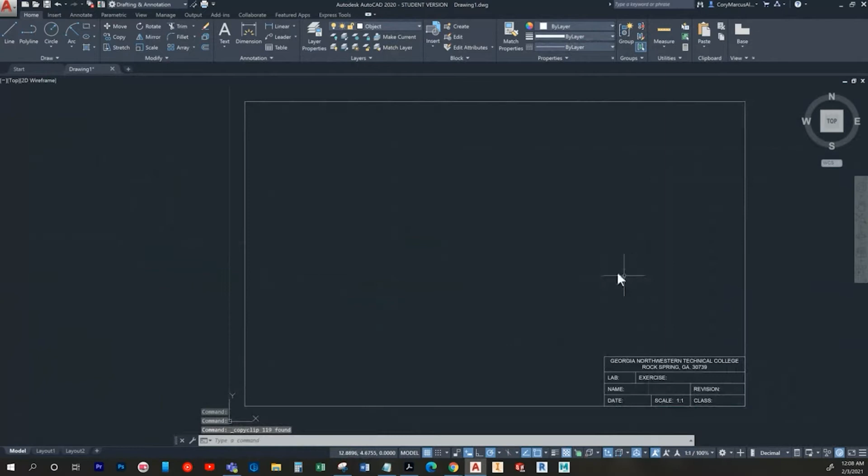So from the last one, I'm actually going to kind of cheat and copy the same one over here, but we're going to change it up, of course. I just don't want to have to redraw the head, basically. So we're going to do 6 thread per inch, right hand double thread.

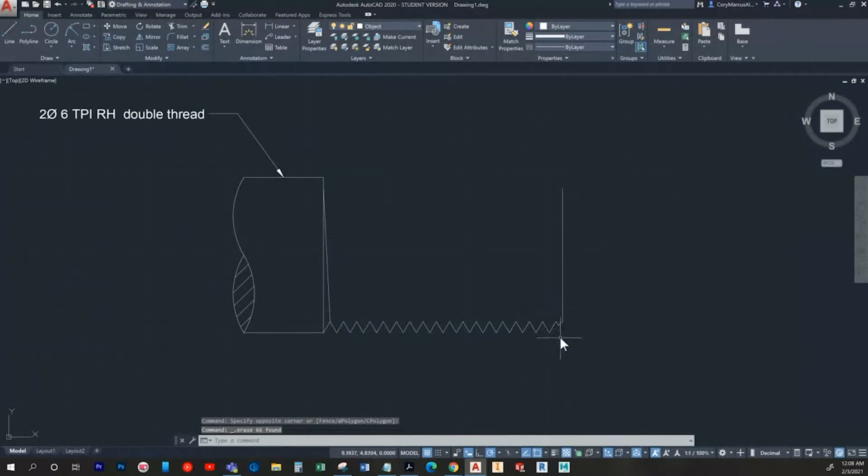So the big difference here, and we're going to do no chamfer on this one just for the heck of it, just to have a little bit of variation here. So the big difference is going to be that traversal distance.

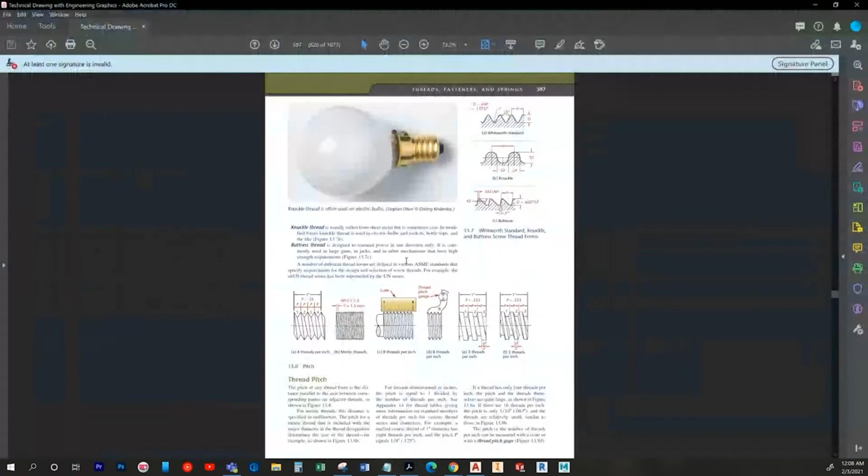And you know what? I guess we could have probably kept our actual profile, but technically it is different. So like you've got the same shape, but the placement's different. So instead of going up from the start, you're technically starting at the middle, so it'll go down, and then you're going to have it mirrored across the axis.

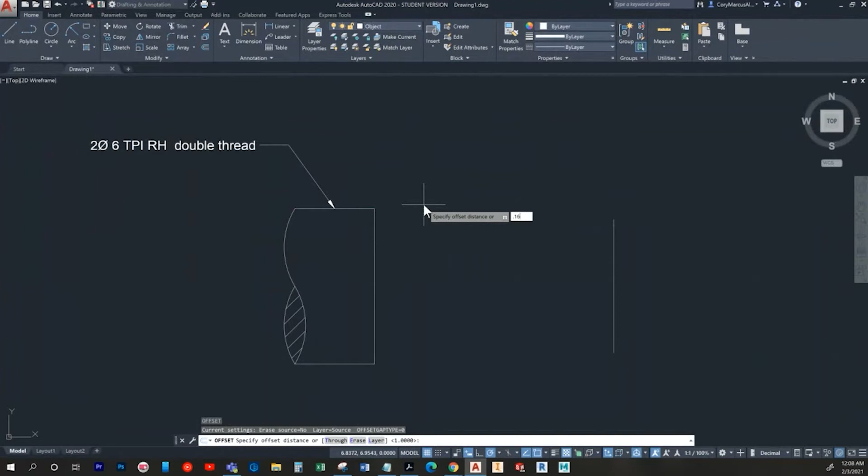So I'll just draw it again, no biggie. And we're going to do offset of 0.16667. I'm going to go ahead and just connect the dot here between the two so I have a good midpoint. And then we're just going to slap in the 30-degree angle.

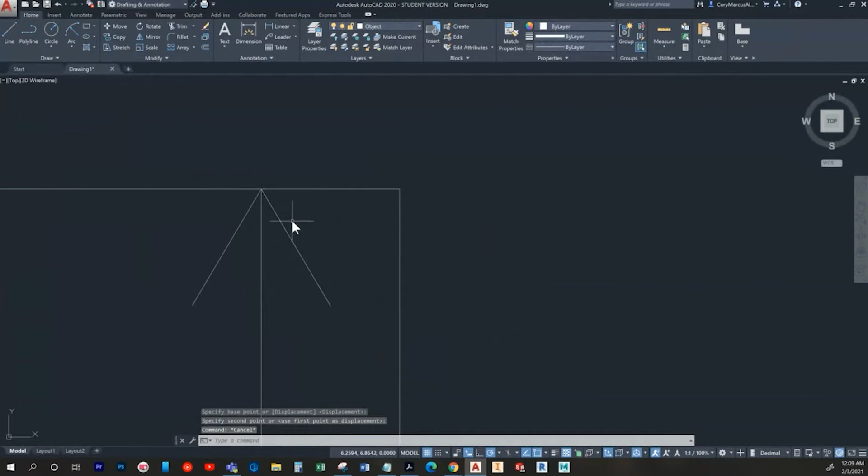I'm going to go ahead and trim. Now I'm actually going to move it over to here. From here, come on you, I'm just going to copy it a bunch.

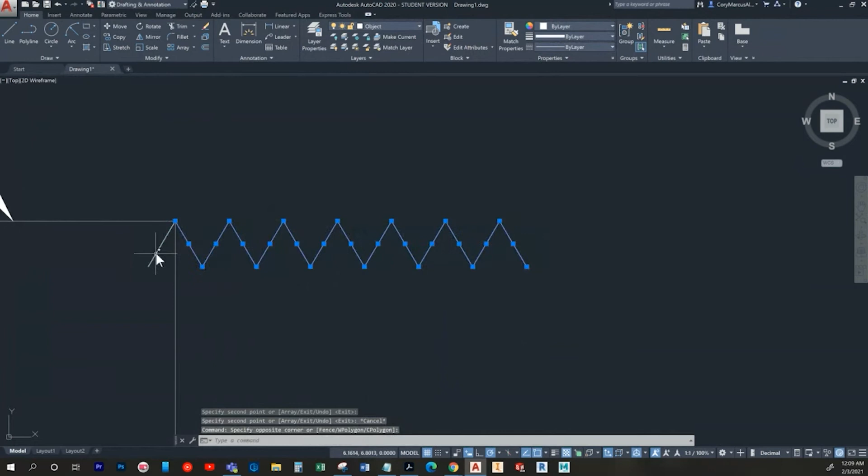Okay, so this one's a little different. I mentioned before, so when it's a double thread, instead of it being copied and pasted like in a single thread, you're actually going to mirror that thread profile on the bottom. So I'm going to mirror it across the axis.

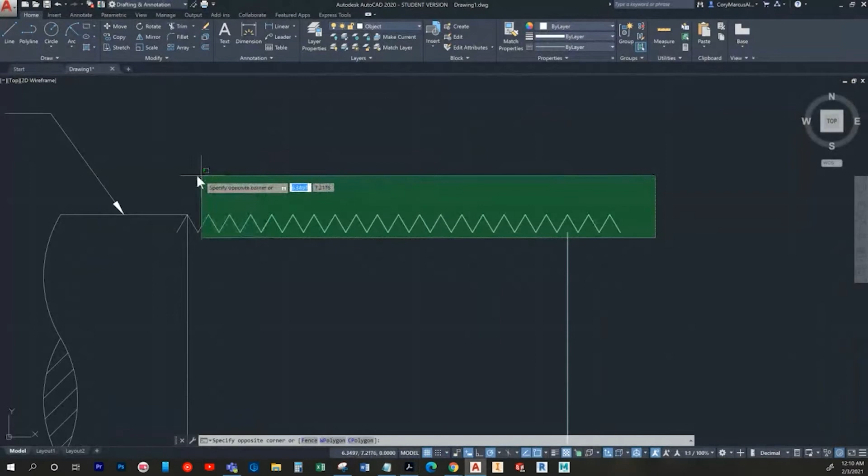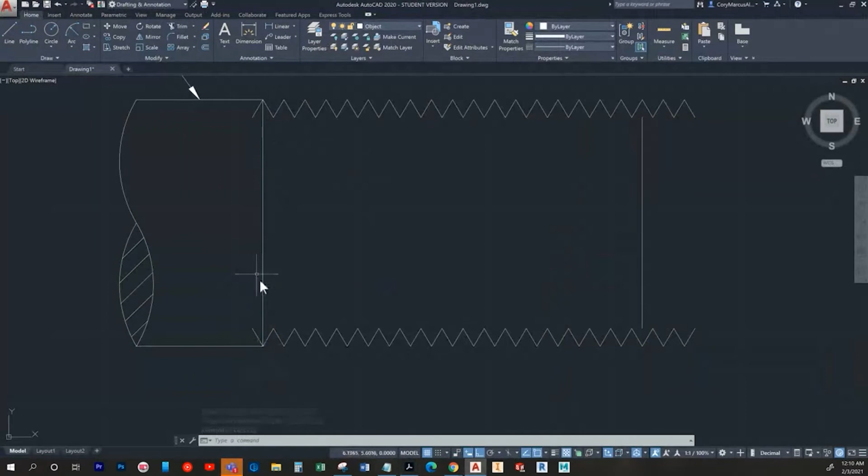So I'm just going to quickly box select all of that, type in mirror, and put ortho on. Okay, so there we go. Now we've got that same shape. We've got down and up. So down and up. Go ahead and delete this little tidbit.

And I'm going to extend this little ending so I can trim the rest. You know, I don't need to trim.

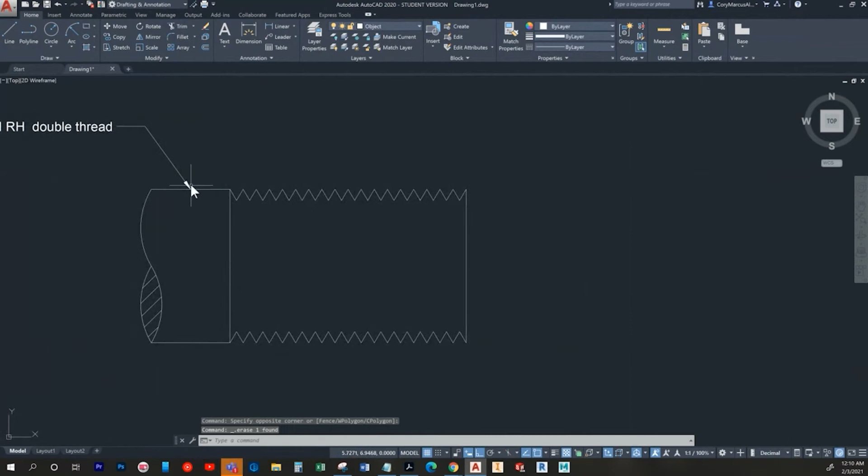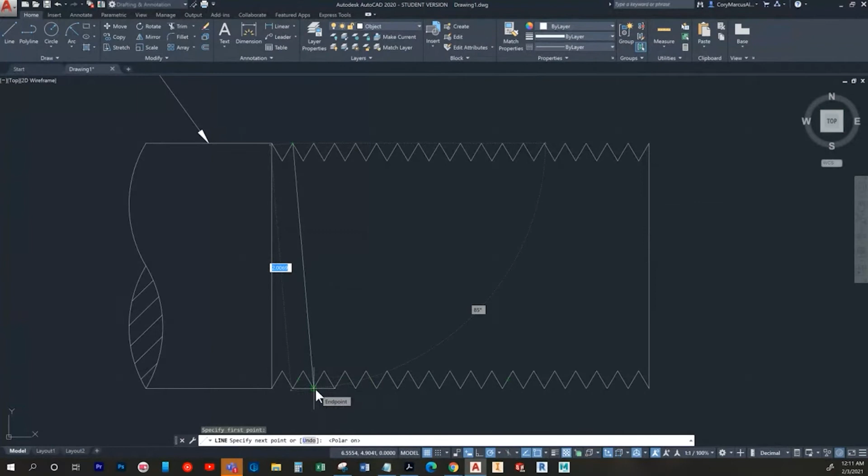So this time around, though, let me take it off ortho. Instead of it being, you know, just over like that, it's going to be over, well, it's here technically because you have a further traversal. But that should add up. I'm pretty sure it's this one.

I'm not going to lie, you know, there's a lot of guesswork in it, but basically it should be P and 2P. So from here to here is P, and from...

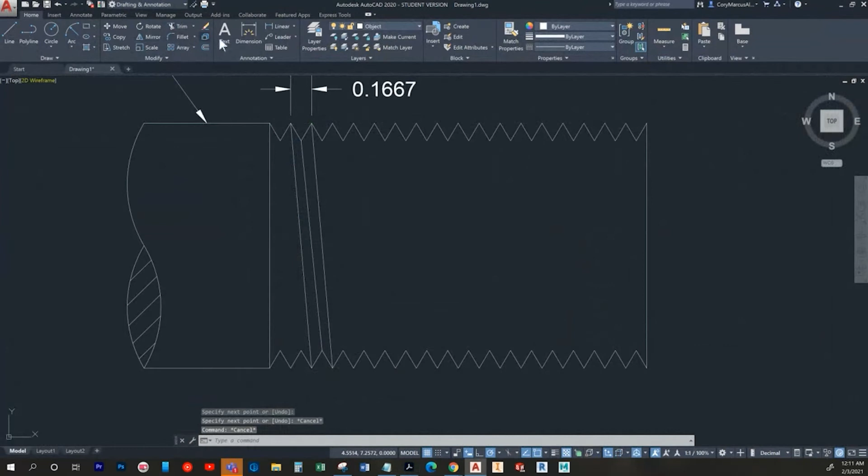Here to, wait, where does it start measuring from? Okay, so from here to here is P.

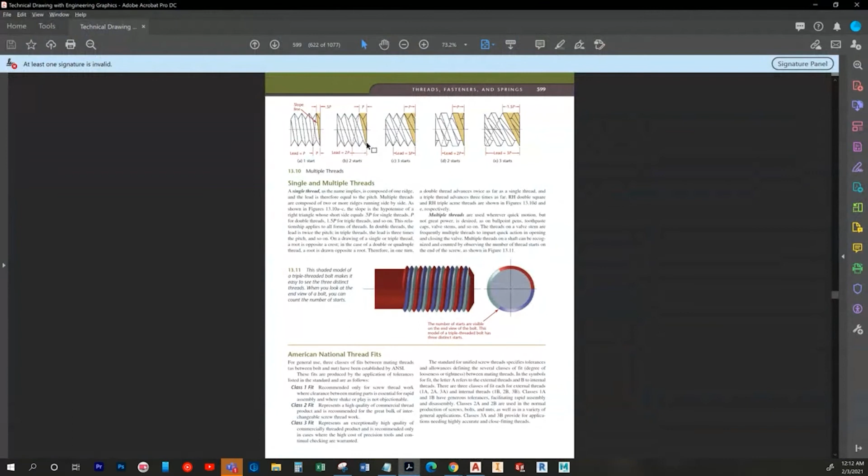Okay, so then from that same edge, it's 2P. So it should be from here to the end of this slanted edge that we already dimensioned to, and it's 2 times. So like in this case, it's still the same concept.

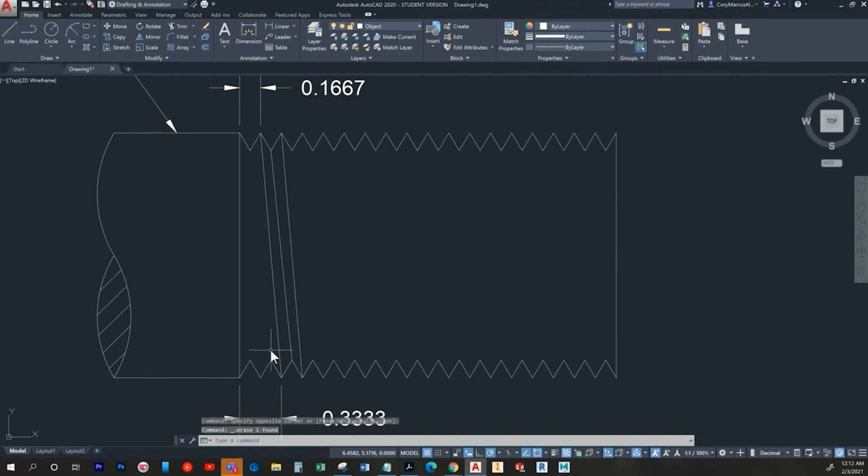You know, like from straight down, clearly there's nothing for it to land on right here, but you know that it's not the same tooth, so it's got to be the next one, and that next tooth is the one that it's supposed to be. So you're literally just going from straight down over to the next tooth available besides the one that you landed in straight down to begin with, if that makes sense.

So then, you know, we can just go ahead and connect the dots. Going to be the exact same layout. I can copy it. I missed one.

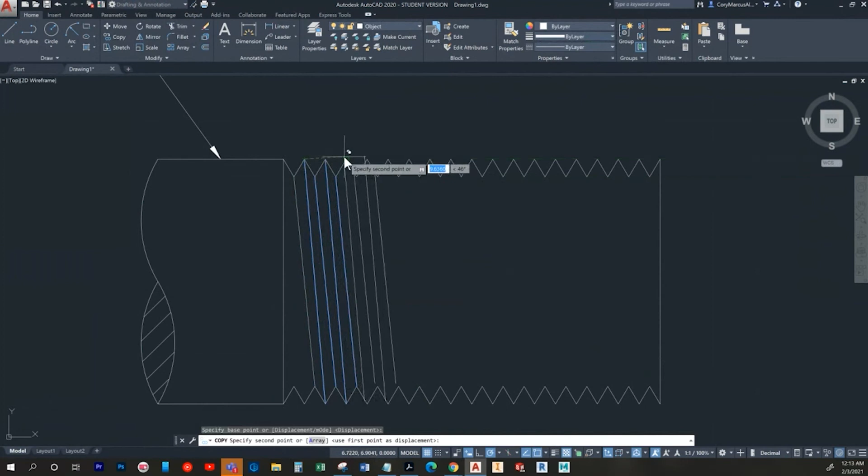Oh, you know what? I had an extra in there. Well, poo. Okay, so I think I'm pasting a few extras, but that's okay.

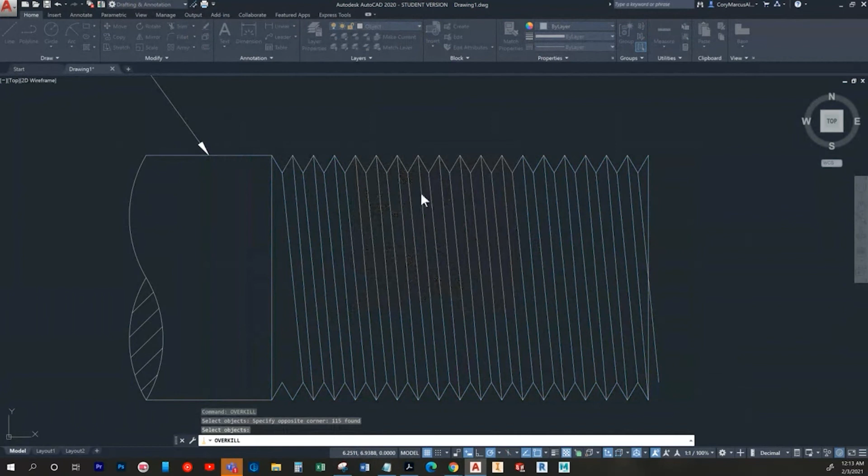I'll throw in a nice trick while we're here. You can type in overkill. Hit OK, and it'll delete any extra lines that are laying on top of each other right there. So there you go. There's a freebie.

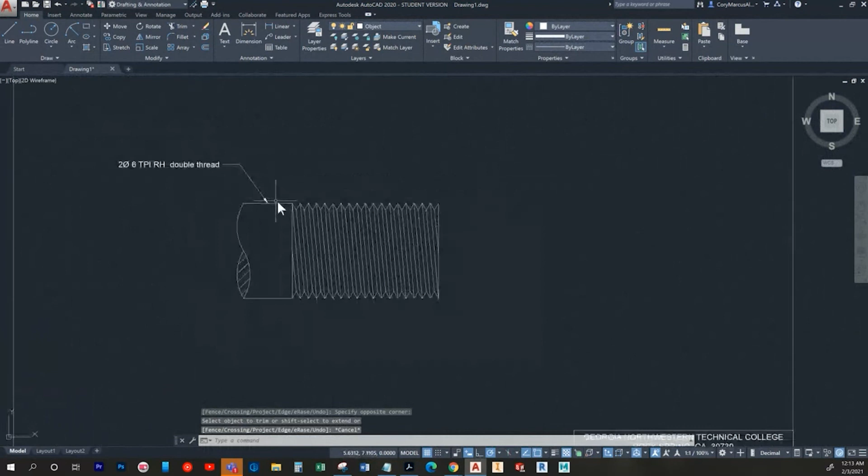All right. So I'm going to trim. And notice this one does actually pass over these lines, you know. And here's a great example of the difference.

I drew these with the same specs, but if you notice, their travel distance is not the same. You can slightly tell, but this one just leans further forward. There's a slight traversal distance difference.

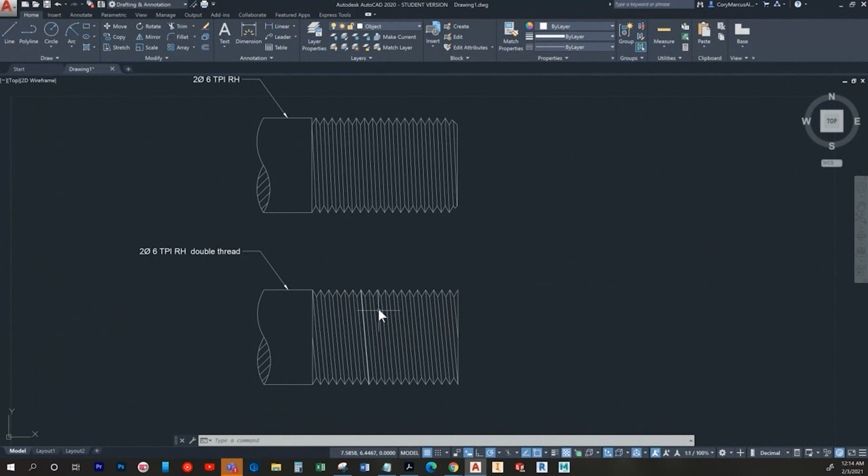And basically, you know, this one's probably going to screw on a lot quicker because it's going further each turn than this one, which is darn near vertical when you're zoomed out, you know. It's not really, but yeah. So that's all there is to it.